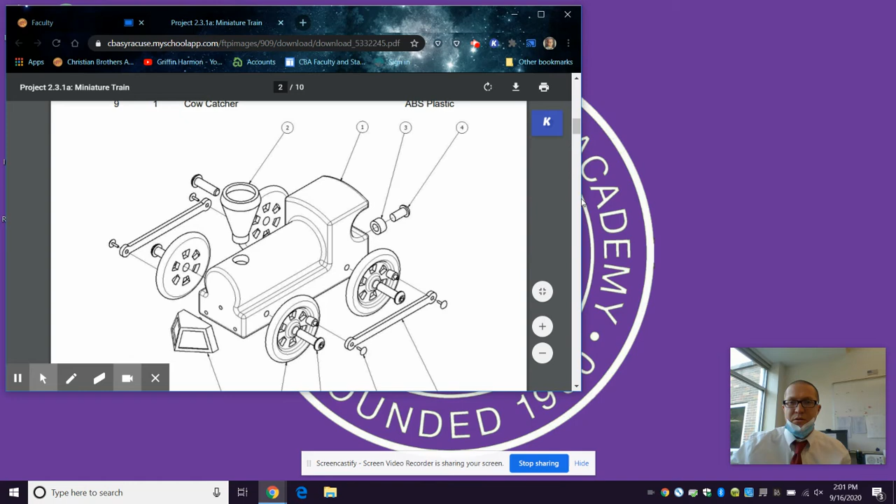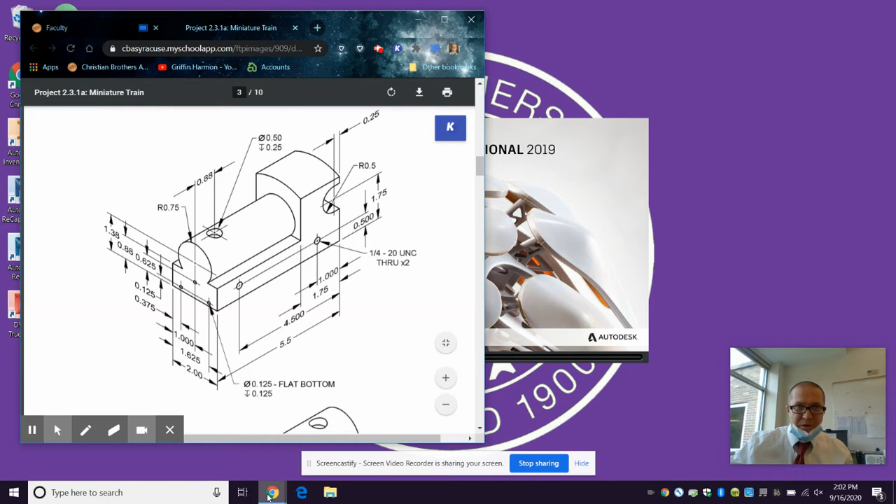Okay, when I do this project, guys, I have the PDF file at the ready, because you're constantly checking back to the dimensions. And then Autodesk Inventor, I have going, so I'll boot that up, and then I'm just trying to figure it out. To me, the easiest thing to do is to start by making an L, and then go from there. Well, it's not showing. Hold on a second, I gotta cast something else for you guys. Give me one second.

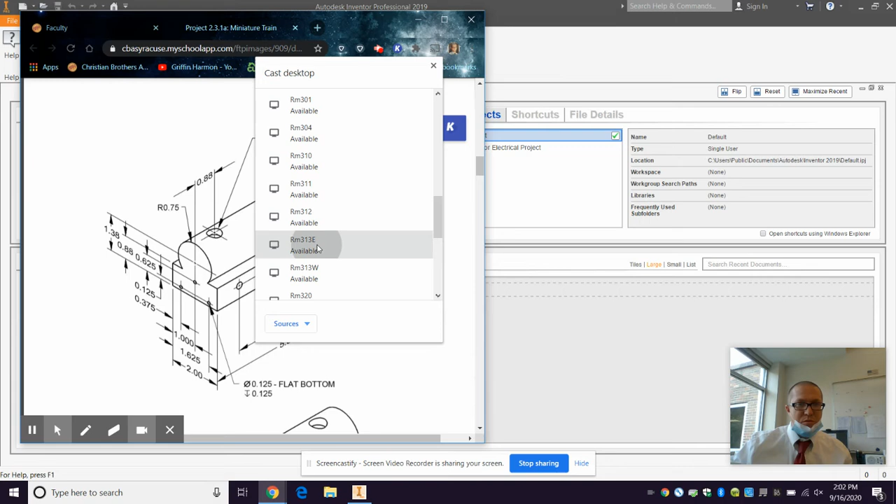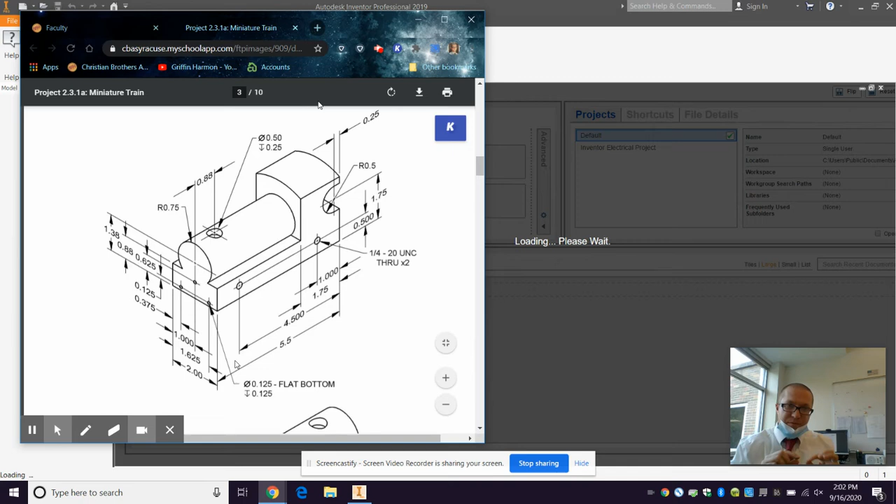All right, so the first thing I do here is I make this L, and it's 5.5 inches wide, and then you got to figure out how tall to make the back of it, right? So that's the trick, figuring out how high to make the back of this.

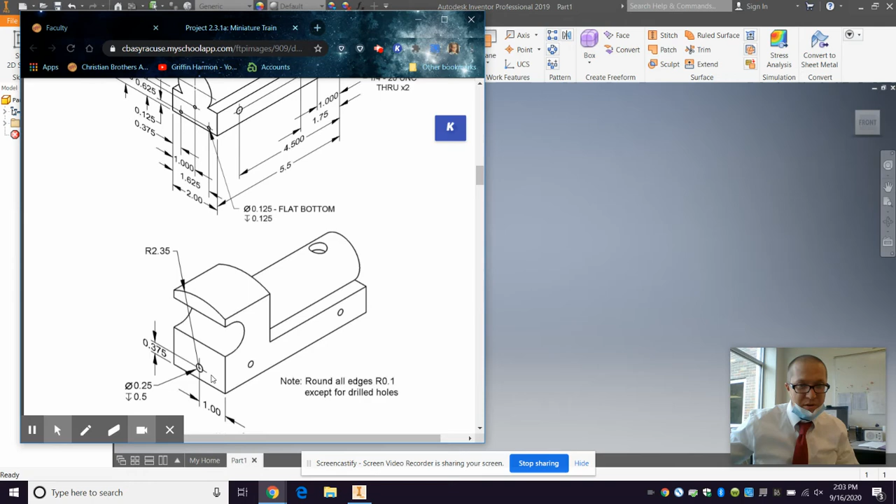Well, turns out it's going to be, if you look at that back view, 0.375 inches plus 2.35 inches to get the full height in the back, because that radius is going from the top down to the center mark of that hole. That's 2.35, and then to get to the bottom of the model, it's another 0.375.

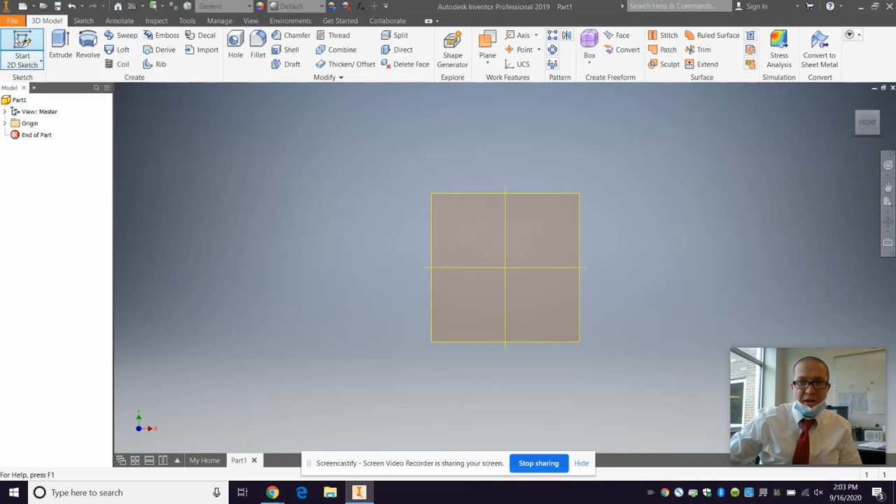So I'm going to start that sketch, and I'm going to draw a line. Sometimes what I do is I just draw the basic shape of it, even if it's the total wrong size, and then just start dimensioning it. Does that make sense? Get what I'm saying there?

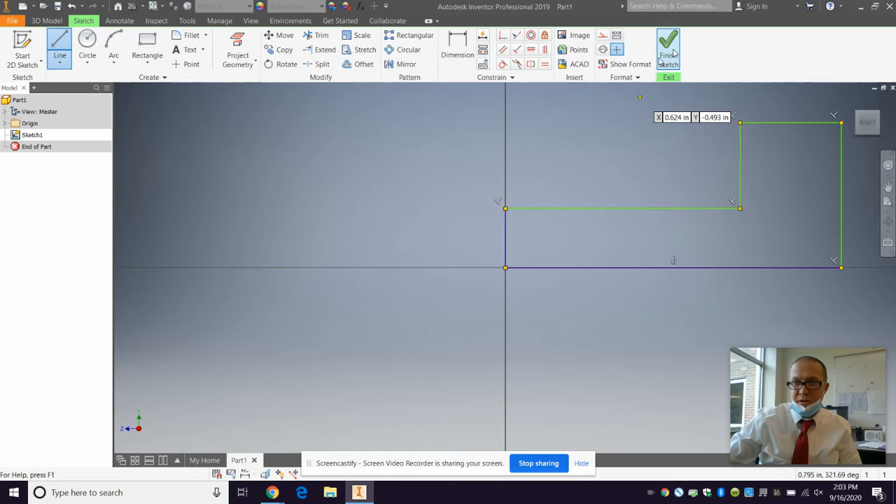Oh, I shouldn't have finished sketch, that was goofy. So I'm going to dimension that bottom line now. That one's 5.5. All right, that makes everything look wacky though.

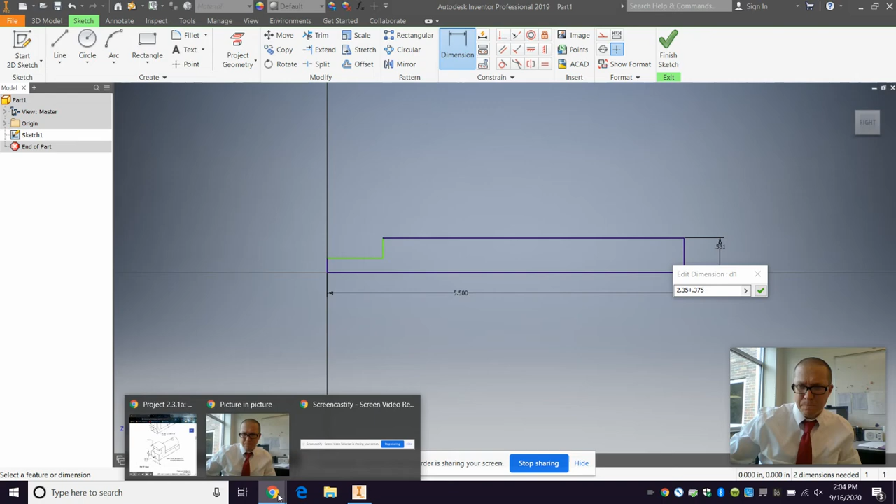So the back of it is 2.35 plus 0.375, was that it? Go back and check the drawing. You guys know that, right? You can do math right in the little box for dimensions, you don't have to add everything in your head. 0.375 plus 2.35, that's a nice thing.

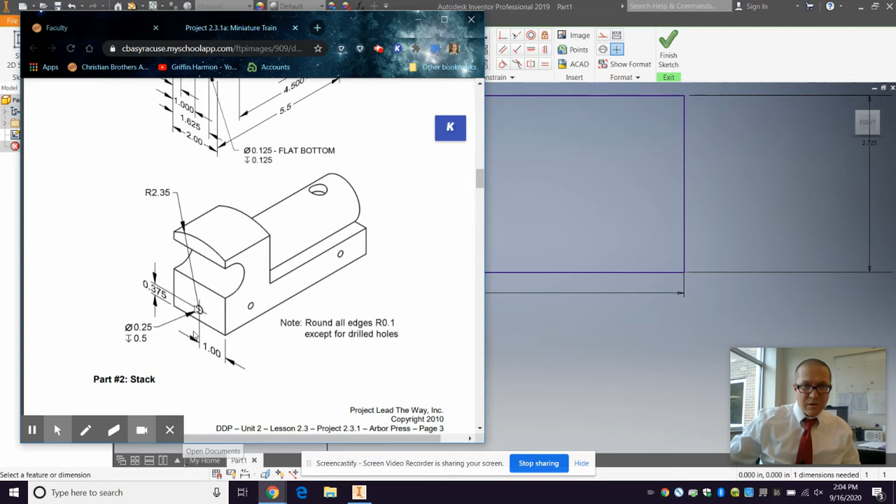All right, there's the height. Now I got to get from here to the front. I'll go back and check my PDF. It looks like it's from there to there. Do I have that measurement? No, but I have from the back to here is 1.75, so that tall part there has got to be 1.75 inches. So actually that dimension is not going to work.

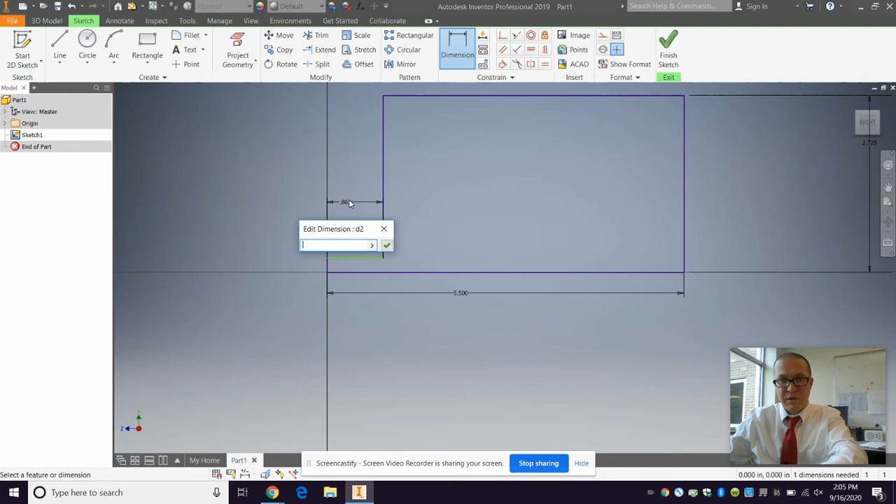I put it there, then actually I have to delete that dimension. So I hit escape, click it, delete it, and I go here. This is going to be 1.75. All right, now I have to get this height.

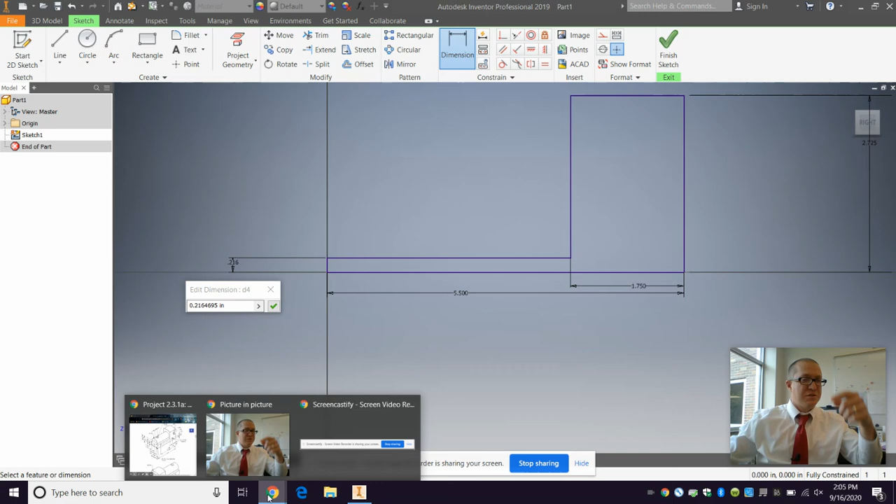I think that's in there, I think I'll be able to get that. Make sure you sign back in over there. And the height of this part is, holy cow, it's kind of hard to see. What is it there? 0.88, I believe. It's jumbled in there pretty good, but you can see it. 0.88. All right, I think that's all those dimensions.

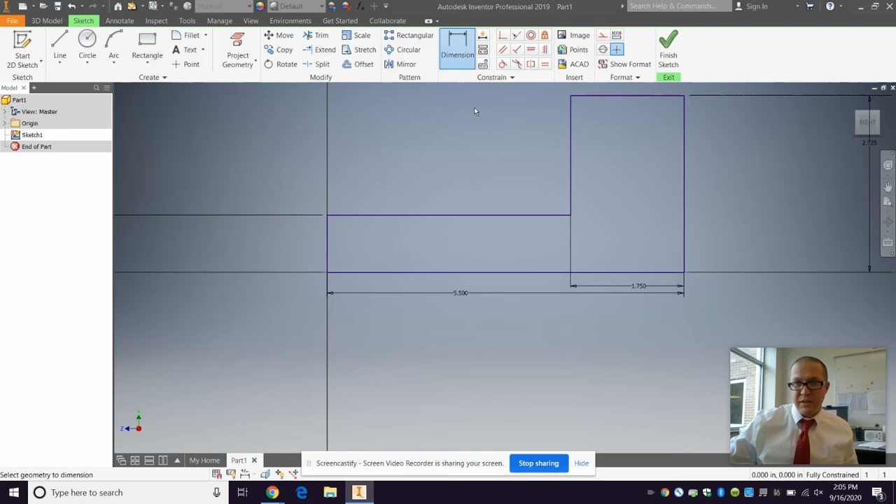Finish sketch, should be coming back to you. Extrude it. All right, my computer is running a little slow because I'm running Screencastify right now, and this is a really beefy laptop too. 2.0 inches wide.

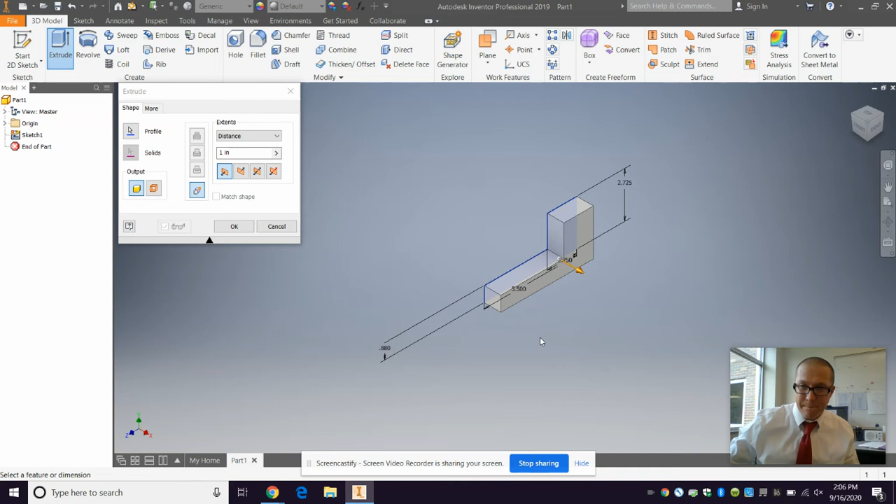All right, now last thing I'm going to show real quick is how to get that top rounded, and this is a really good operation to know how to do. So I'm going to start a sketch on the back, and put a point right in the center of the back. Oh, it's not snapping. Do you remember what to do to be able to use that geometry?

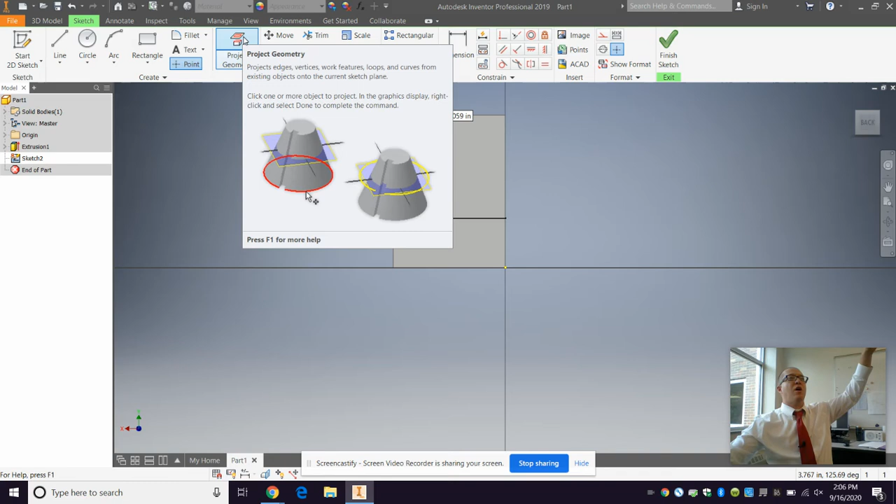Project geometry, guys, that's a huge, awesome tool, project geometry on the back there. So I click project geometry. That's something in engineering 2, when you're doing advanced modeling, we use all the time. Project geometry is so important, so useful. So I click that, and now that brings the outline of that back part into this, and now when I go to place a point, it'll snap right between the two sides, and that'll be centered.

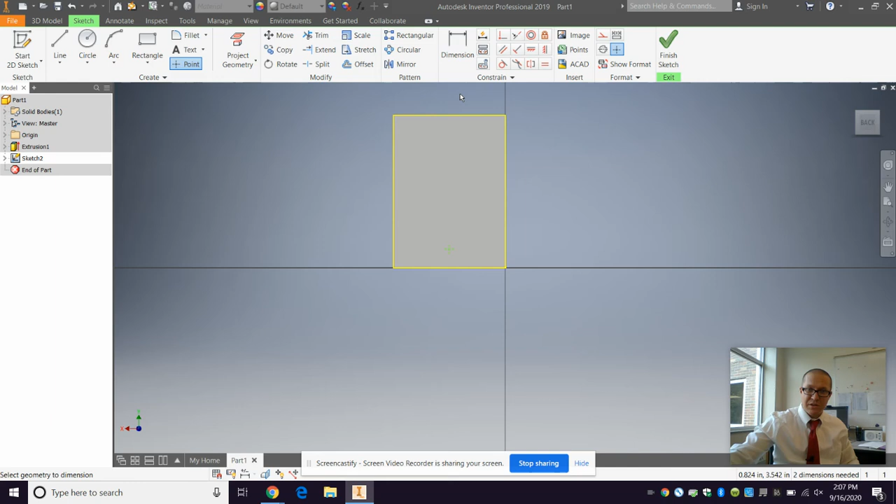Now I dimension that point off the bottom. I'm putting it where I want the center of the hole to be, which is 0.375. All right, now here's the trick, you ready? Check this out. Circle, I'm gonna make a circle. I'm going to make it go tangent up to the top here, right? See that?

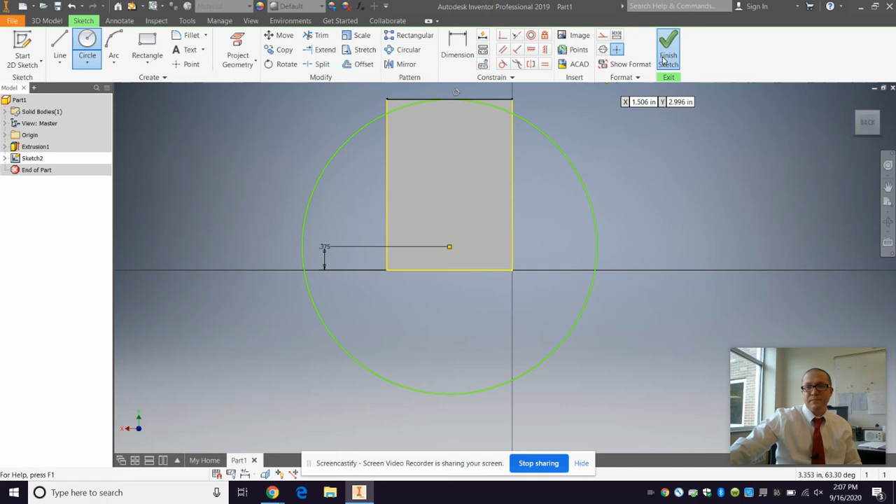You ready for something wild? This is an extrusion. Remember that project where we went and did like every possible type of extrusion and all that? You kind of blast through it, it's also a Project Lead the Way thing, and you guys just take a bunch of screenshots and print them out for me. Can I remember that? Remember that? It's like an early project.

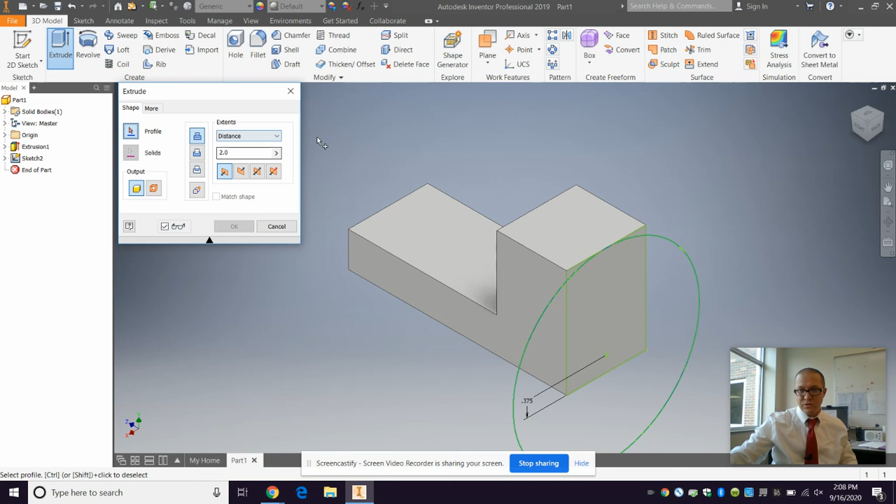All right, anyway, there's a type of extrusion, it's this one right here, intersect. So what it does, an intersect extrusion just keeps the part of the solid that will be within that surface. So I'm going to pick this surface, I'm going to make it go all. It just makes it go across everything. I'm going to make it an intersect. So you see what that does? It's extruding off anything outside of that circle.

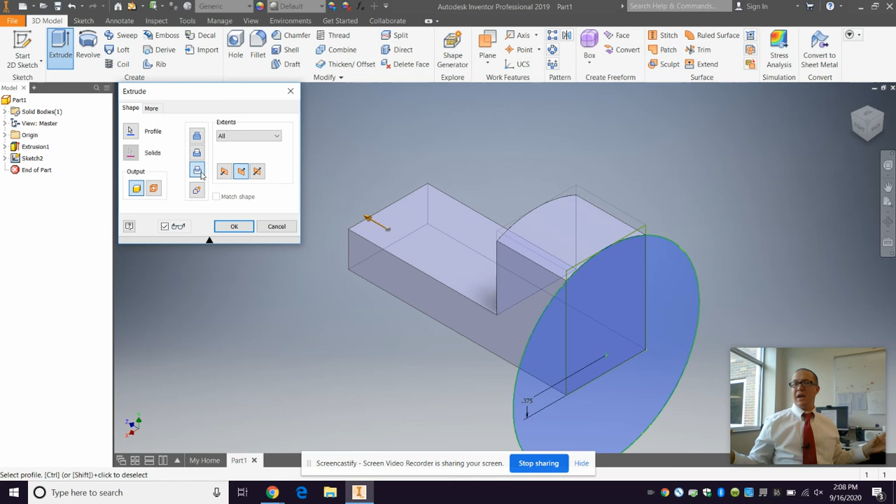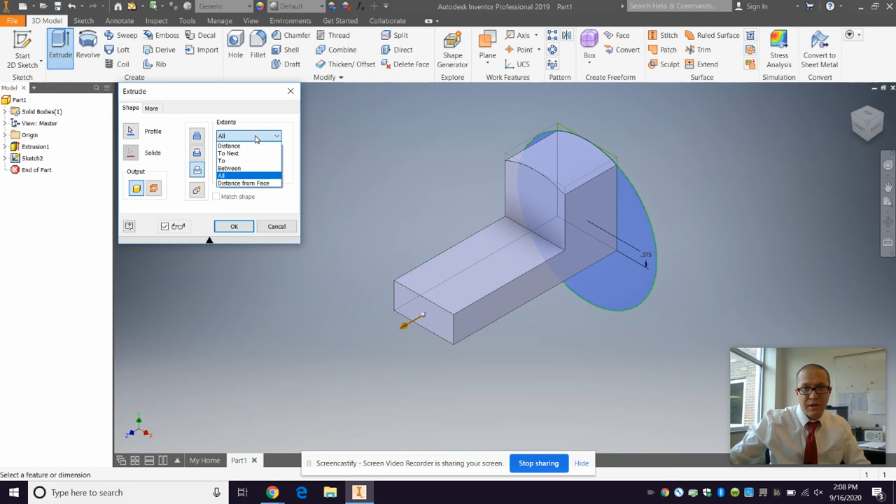And these extents, this is another thing, this is like next level stuff, engineering 2 stuff. The extents are awesome, so all will literally, no matter how big this part is, it'll just blast it all the way to the end of the part. If you want to send it to a specific surface, check this out. You can do extent, you can do To, and I can send it to this surface, but that doesn't include that part there, so that doesn't really make sense. That's not a really good option there. So in this case, all is good, or you could do To here, which would also keep that part.

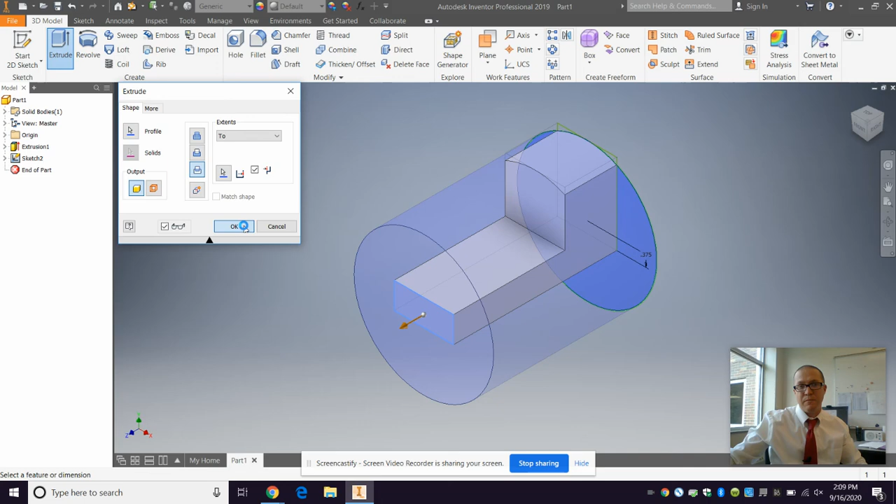Hold on one second. All right, so I'm going to pause it there, and get back to you.